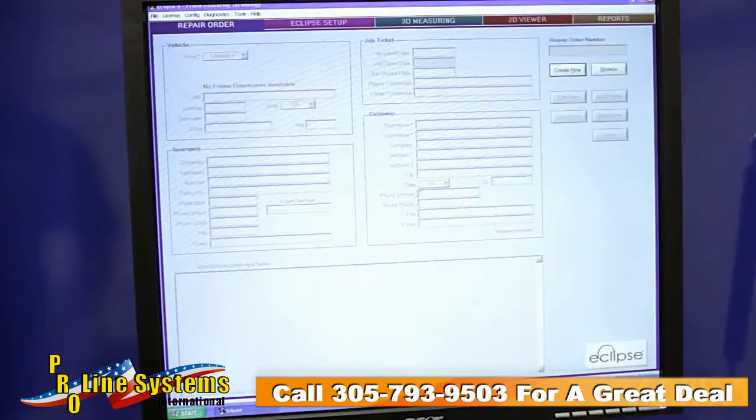From the Repair Order tab, select Create New. Then assign your shop repair order number to the file. After that, fill out the year, make, model, and information that you desire, and it's time to move to the next page.

Now that the repair order has been filled out, we can move on to the hardware section. That is putting the scanner underneath the vehicle and beginning to assign targets.

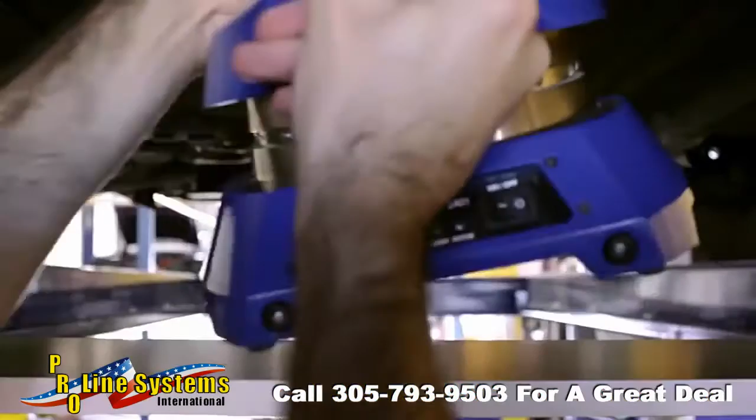Today I'm going to place it in the very center of the vehicle, but you can actually put it anywhere where it can still see the targets.

The scanner on this unit has the ability to compensate for being out of level. So if the car is crooked or the scanner is crooked, the scanner will automatically know that, send the information to the computer, and it will compensate for it.

The next step is to go to the setup page. Here we will assign the targets to the specification points and then hang the targets themselves.

Typically you want to start with the torque box, the basic four measuring points. From there you can branch out anywhere between eight, twelve, as many targets as you need to find the damage to the vehicle. Just to remind you, the torque box is a known undamaged area under the vehicle, usually in a square pattern of only four targets that you know you can trust.

Once you've established your torque box, the rest of the location of targets is entirely up to the technician. If you have damage at the front of the vehicle, start placing your targets out towards the front. Same thing for the rear of the car.

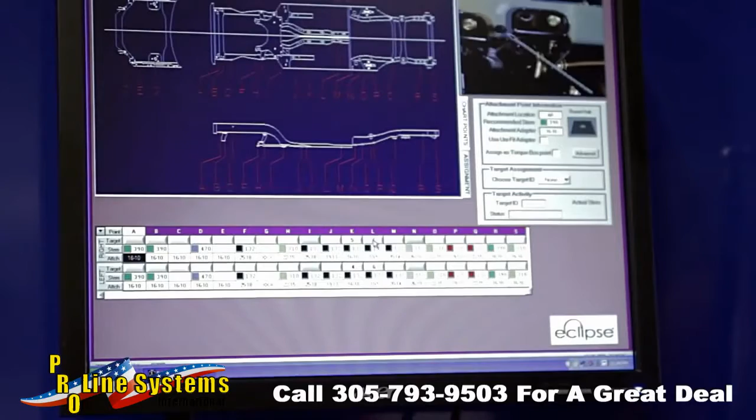Looking at the graphics viewer in the Eclipse setup module, we left-click on a point in the torque box of this car. On the computer screen, we see a photo of the spec point. We're going to select point L.

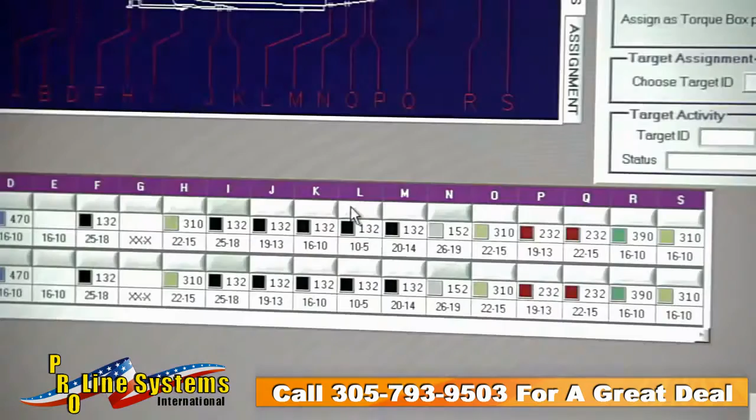The target number will automatically assign itself to the selected point when you plug it in. You can also select a target location manually in the target assignment box.

We see that the point is a hole. The recommended attachment adapter is a 1610. The recommended stem is a red 232 millimeter stem.

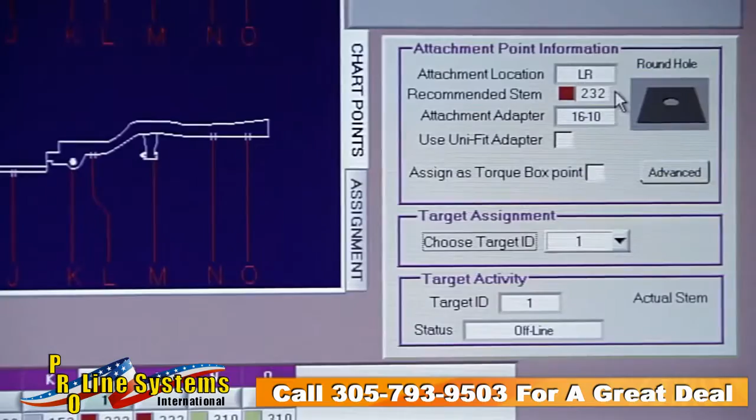First, pick a magnetic coupler and recommended bolt and hole adapter. They join together magnetically. Then, select a target from the charging tray.

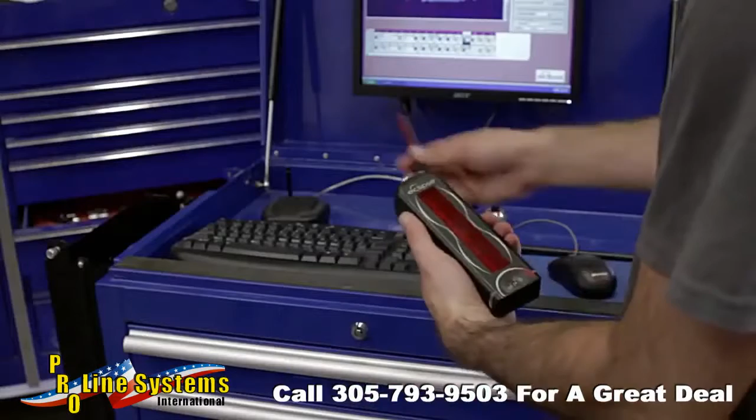Next, plug the recommended stem into the target. Finally, snap the ball end of the stem into the target ball grip on the magnetic adapter.

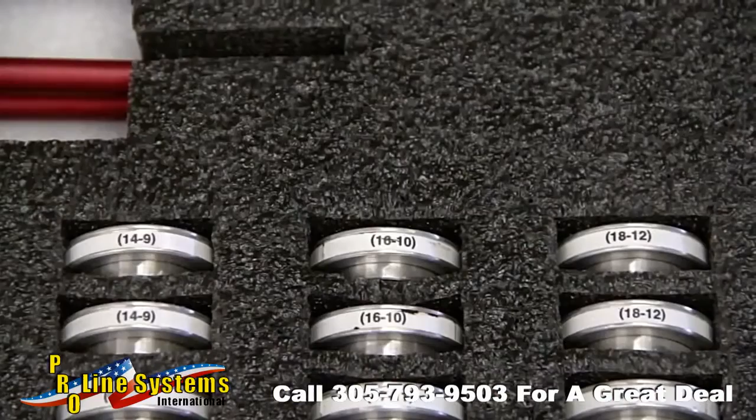The numbers on the magnetic adapter tell you that it will fit a 16 millimeter diameter hole or a 10 millimeter diameter bolt head. The adapters will fit a hole, a slotted hole, a bolt head, or a stud.

For a hole or slotted hole in an aluminum chassis, use an orange Uni-Fit. The Uni-Fit adapts to a range of hole diameters indicated by the numbers on the side.

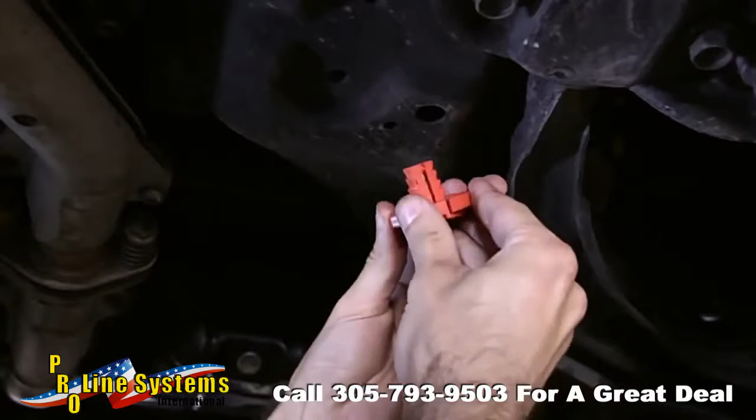Attach a stem to the Unifit the same way as you do for a magnetic coupler. Attach the Unifit to the spec point hole by squeezing the two halves together. Then insert the Unifit into the hole until the appropriate step is reached.

Simply check the Unifit selection in the attachment point information section. For slotted holes, remember you should always slide the adapter to the forwardmost position of the vehicle.

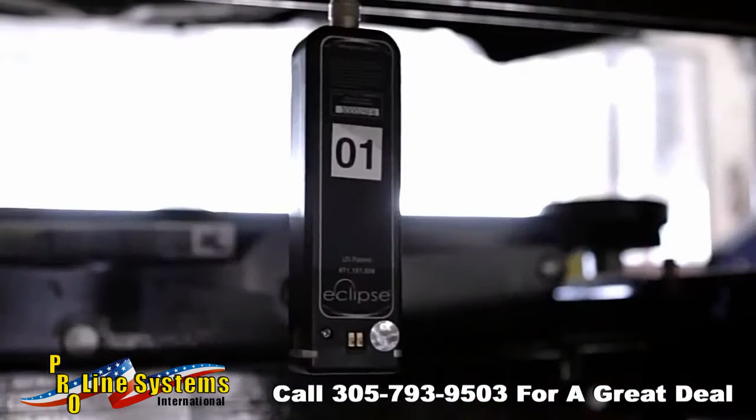Turn the target so the red surface faces the laser scanner. You can tell that the target is aligned properly when the LED at the bottom of the target is flashing green. If the target is above or below the laser light beams, pick a stem with a different length, one that positions the target where it is struck by the laser beams. The target automatically reads the new length of the stem.

Continue assigning targets to specification points and hanging them. The more targets are hung, the better you can see the damage of the vehicle.

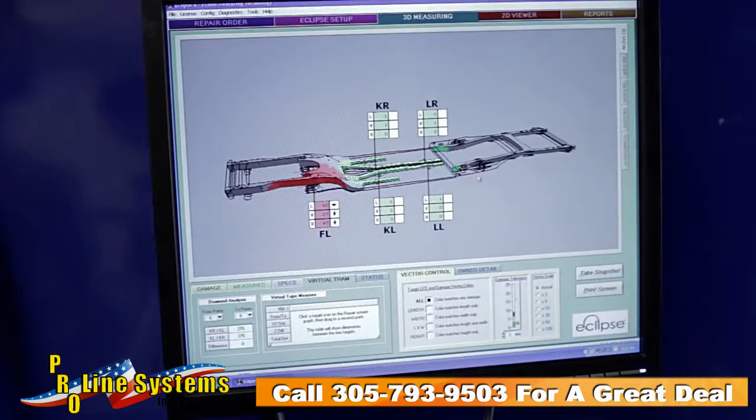Now that we've got the targets assigned and hung, we can move over to the 3D display and look at the measurements. In just a few seconds, the Eclipse laser measuring system scans the laser targets and develops a complete set of measurements. The 3D measurement module assesses damage according to how far out of tolerance a spec point is.

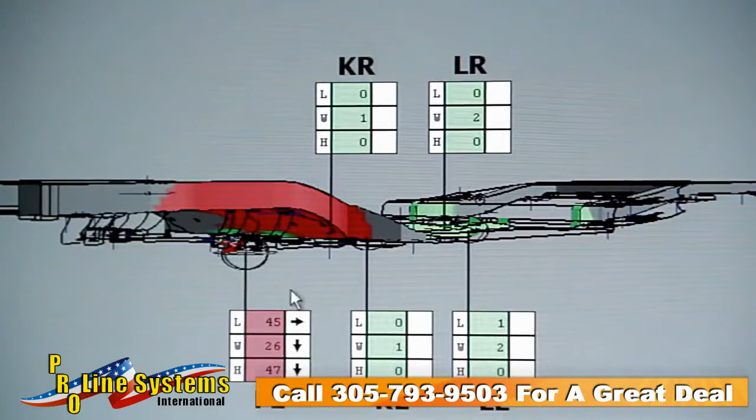If it is located within the tolerance zone of plus or minus 5 millimeters, the model is colored green. When the damage is more than tolerance but less than twice the tolerance, it is shown in yellow. Damage greater than twice the tolerance zone, in this case more than 10 millimeters, is shown in red. You can adjust the tolerance zone here in the damage tolerance box of the vector control portion of the screen.

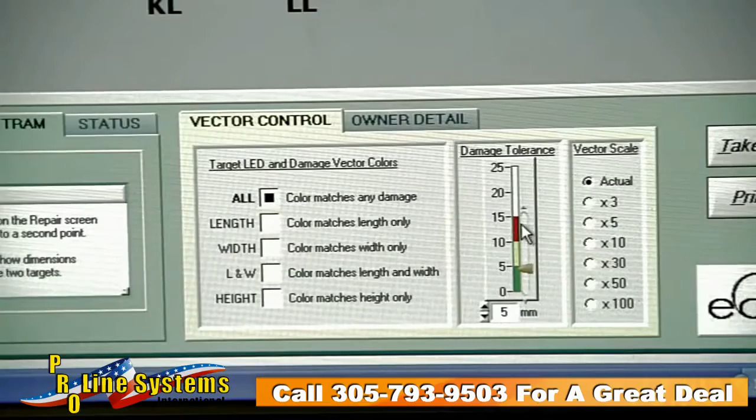Look here to see the arrows that indicate the direction and magnitude of the movement. We've seen how the Eclipse measuring system's 3D display will show us where the damaged areas of the vehicle are. You're going to want to use that information to prepare a repair strategy. We'll get to that in a moment.

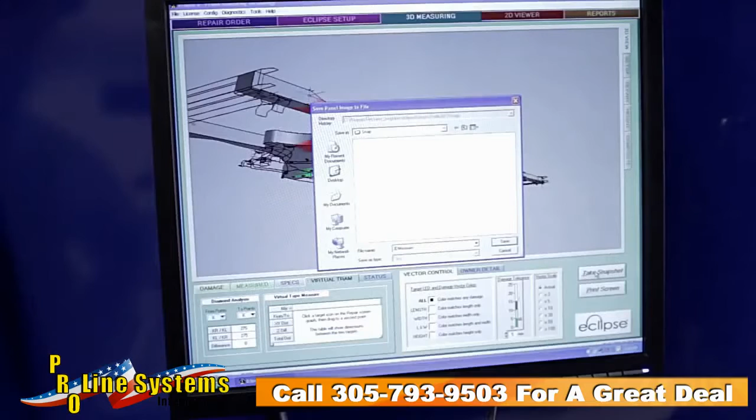But before we do, now would be a good time to record and document the measurements of that damage. Click the snapshot button. This saves the image to the repair order folder to use in reports.

Print screen will print the screen information along with vehicle and shop information. Since you have saved the image, you can wait until you have finished the report to print the information.

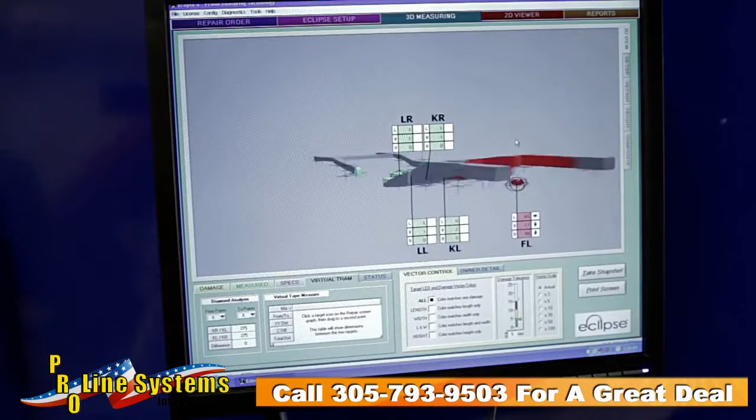Now let's see how we can use the 3D measurement screen to develop a repair strategy. First, let's magnify the arrows so that we can see them clearly. We'll select an arrow scale of 50.

Remember, the vectors show the direction of the damage. You want to pull in a direction opposite of the vectors to straighten the damage. To see the vectors better, we can click and drag to rotate the 3D model. Zoom in or out with the scroll wheel on your mouse.

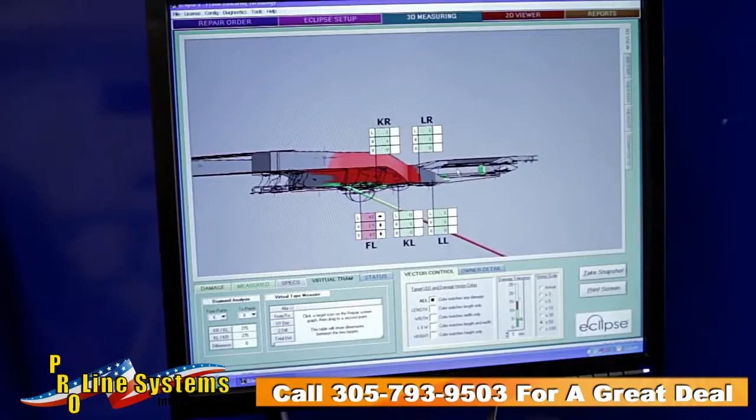To pan the image, press Ctrl and Shift together. Then, click and drag until you see what you want. The vectors give you a good idea of the extent of the damage.

When all spec points are back inside the tolerance zone, the chassis repair is essentially complete. Now is the time to take another snapshot.

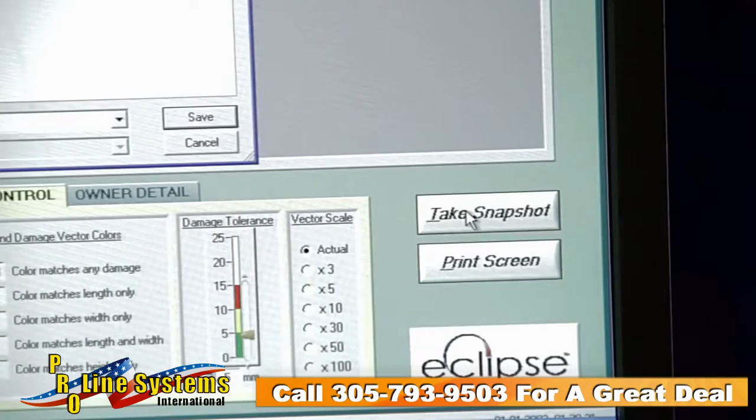This is the time you want to document that the vehicle has been brought back to its pre-loss condition. Your customer and the insurance company will be impressed.

If you would like a quick report as well, simply push the print screen button. When you're finished with the repairs, print off a final document for your customer and the insurance company.

I've walked you through the basic steps of using an Eclipse laser measuring system to repair a vehicle. I hope this video has shown you how easy, fast, accurate, and powerful the Eclipse measuring system can be.

For more detailed information on the Eclipse measuring system, go to the Help tab at the top of the screen.